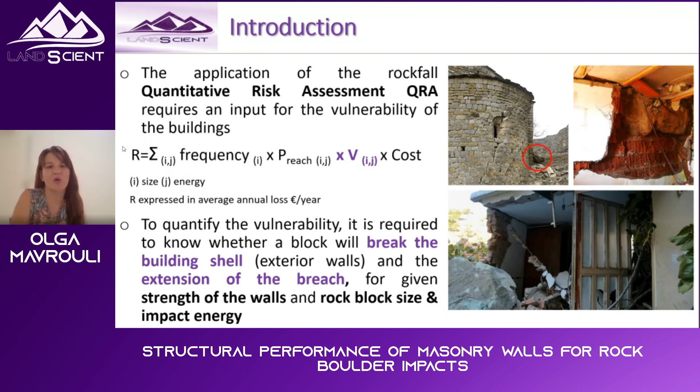So although in the literature, there is some significant and very sophisticated work on the damage of structural protection measures, as for example, galleries and nets, the background for the quantitative assessment of the damage for buildings due to rockfalls is poor. And there is a need for quantitative assessment tools for the vulnerability, for the expected damage in that case. And today I will present the work that has been based on what is described in detail in these two publications, one in the journal Geosciences and the other one in the journal Landslides here. You have both of them here.

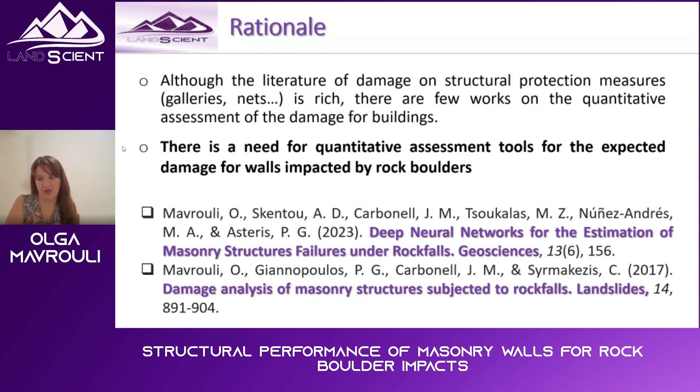So the objectives of the work that I will present here are summarized in this slide. The problem is that we have some empirical data worldwide. However, these hardly cover a full range of structural and rock block properties. And in most cases, they don't even provide information about the structural type and the size, the velocity of the rock block. On the other hand, using computational methods, we can have very sophisticated models that take all these properties into consideration. However, these are difficult to be applied at larger scale and time consuming, as well as they require a high level of knowledge in order to apply them, and a lot of parameters, of course.

So we wanted to investigate the use of soft computing techniques such as artificial neural networks, ANN, and whether they can provide an alternative for the simulation of this kind of highly nonlinear phenomenon. The objectives were three. First, to develop a big analytical database. So our database has been developed numerically for the training of deep neural networks that calculate the damage of a wall when impacted by rock blocks in terms of the damage index. And that quantitative damage index is equal to the damaged wall area divided by the total wall area. Then, to propose an optimum artificial neural network model for the damage index estimation.

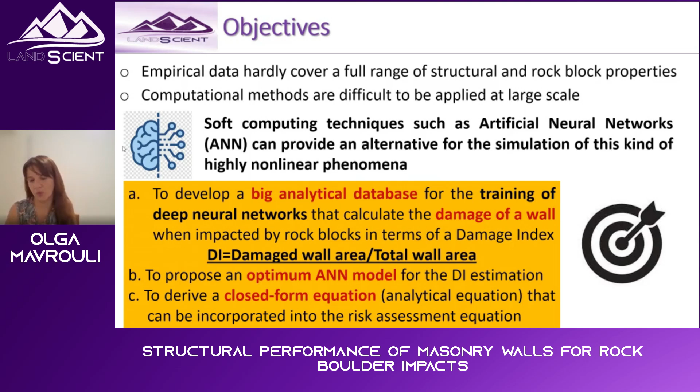And finally, to derive a closed form, an analytical equation that can be directly incorporated into the risk assessment equation that I showed before. So the first objective was the development and the application of a methodology for the calculation of the damage index of a wall impacted by a rock block. And the first step consists of the development of a numerical model to calculate the transmitted impact force from the block, which is shown here, to the wall.

To this end, we use the particle finite element method developed by Oñate et al. at the CIMNE in Barcelona, coupled with a contact domain method, also developed by Carbonell et al., also at the CIMNE Research Center. And we calculate, when the block impacts the wall, the envelope of the maximum contact forces between the two in the direction of the movement, and we extract those maximum contact forces.

Three main assumptions that we make for the simplification of the model are that first, masonry and rock are considered homogeneous, elastic, and deformable bodies. Then that the contact between the wall and the block is elastic. This is a slightly more conservative scenario because it assumes that during the contact, the energy is not damped. And we also assumed in this case a cubic block shape for the rock.

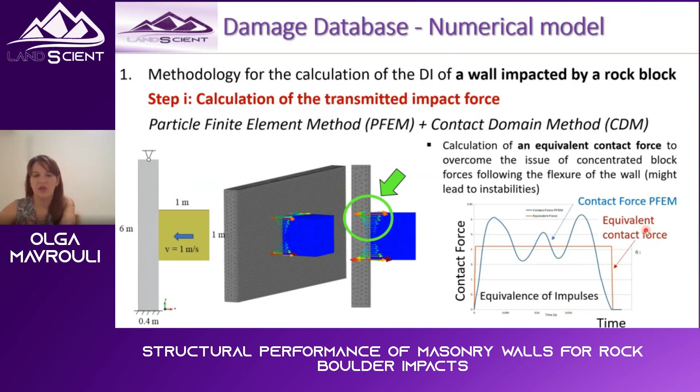The next step was to calculate the damage, and for this we used the finite element analysis software to calculate the stresses on the wall. We used SAP 2000 combined with the failure software. This is a software that was developed at the National Technical University of Athens, and it incorporates modified von Mises failure criteria for masonries. We have validated this methodology for rocks as well by back analysis of real events.

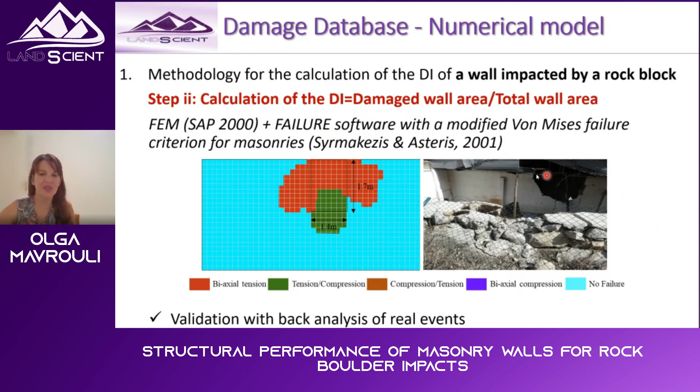As for example, here we can see the damage with red color due to biaxial tension and with green color due to tension compression in the case of this event here. And after different parametric analysis, we were able to develop a

database of 672 datasets, considering the range for 4 different input parameters: the volume of the rock, ranging from 1 to 20 cubic meters, the rock velocity, varying from 1 to 30 meters per second, the thickness of the masonry wall, varying from 40 to 100 centimeters, and the masonry tensile strength, varying from 0.10 to 0.60 megapascal.

For the calculation of the masonry tensile strength, we took into consideration the recommendations provided by Eurocode 6 for masonries that provides an equation for the calculation of the masonry tensile strength given block type and different mortar qualities. So for each one of those 672 combinations of these parameters, we got a damage index covering a full range from 0 to almost 100%.

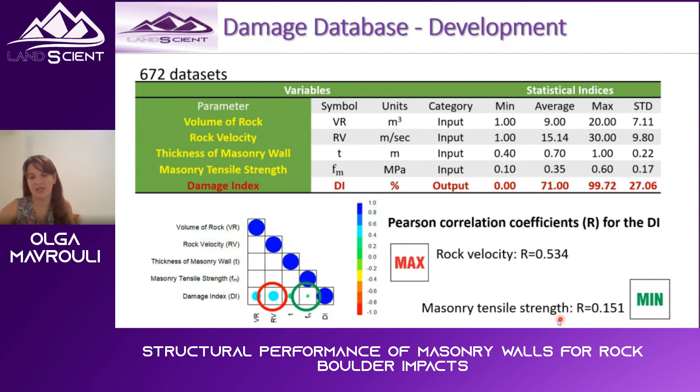And from the statistical correlation analysis we did, we got the maximum Pearson correlation coefficient R to be 0.53 and the minimum 0.15, in that case for the rock velocity, and in the case of the minimum correlation for the masonry tensile strength, as we can see here. This leads us to understand that there is a non-linearity of the phenomenon that can be captured with the ANN model.

So in order to identify the optimal ANN model, we ran more than 3 million different models. First, we split our data sets into training, validating, and testing data sets. We have a very good size of sample. We tried 6 different optimization algorithms. We tried data normalization using 4 different techniques, including min-max and Z-score. And for each neural network architecture, we used 12 different transfer functions.

And after all these different analyses, we came up with the best model characteristics that consists of 24 neurons. It has been optimized by the Levenberg-Marquardt algorithm. The data normalization technique was the min-max, and the normalized radial basis and the hyperbolic tangent sigmoid transfer function were used for the input layer and the output layer, respectively.

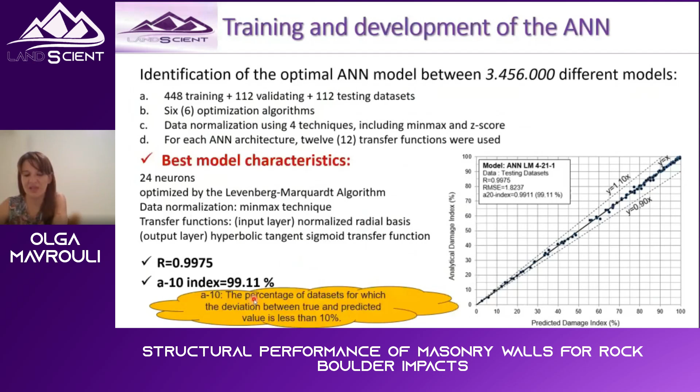What I would like to show here is the goodness of the fitting. Here we have the analytical damage index values from 0 to 100% and the predicted damage index values, and we can see a very good correlation with a Pearson coefficient 0.9975 and an additional A10 index, which represents the percentage of data sets for which the deviation between true and predicted value is less than 10%, equal to 99.11%.

And then we derived an analytical, closed form equation in function of the input variables. And what's good about this equation is that it can be directly incorporated into the quantitative risk assessment equation, which consists of the damage index normalized. That's a function depending on the 4 input parameters and the 2 transfer functions, the minimum damage index 0, the maximum 100%, and 2 further constants, limits of the min-max normalization technique.

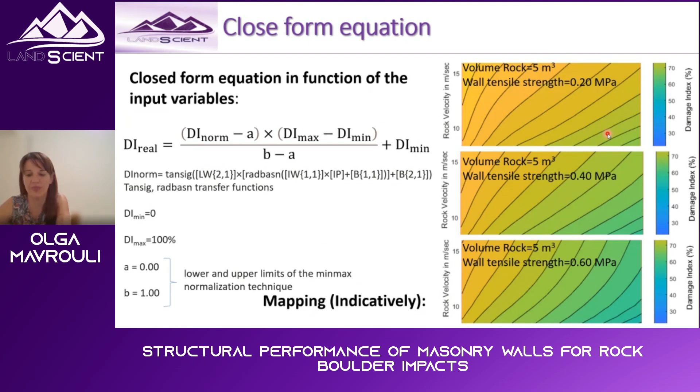Just some final remarks to end this presentation. Using the proposed artificial neural network, the fitted curves were observed to be smooth, which indicates that there is no overfitting. The model works well. What's most important about these results is that this analytical equation can be used for direct integration into the quantitative risk equation. However, it's very important to also mention some limitations.

So the first one is that this damage index is a simplified damage index, which refers to the initial impact on the exterior walls, and it considers neither the propagation of the rock into the building, nor potential collapse of the building, nor structural damage. So further work should be done in order to incorporate these aspects into our methodology. And of course, this model can be applied only for the range of the parameters that I have shown. So extrapolation in this case is not permitted.